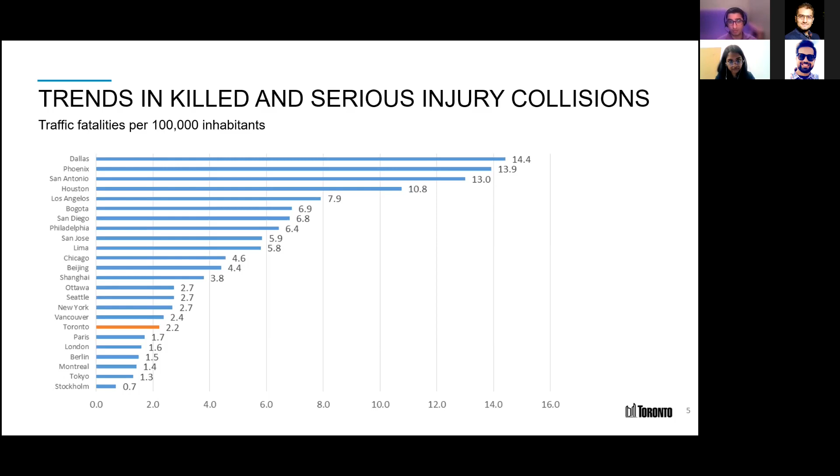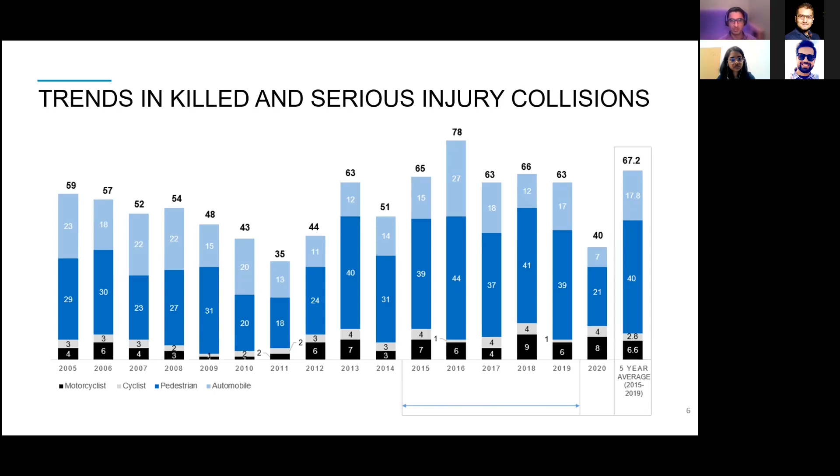Quickly about the traditional way we used to look at road safety versus moving towards a Vision Zero approach. So it's really about changing the mindset that traffic fatalities are not inevitable. They're in fact preventable.

Collisions are not due to non-compliant road users. We know that humans are going to make mistakes. Drivers may be put into situations where they can't perform perfectly. So we need to make sure that the roads are designed and operated so that if those mistakes happen, they don't result in serious injury and fatality.

And again, that comes down to moving away from looking at all collisions and trying to reduce them, to actually just looking at the serious ones, the ones that result in personal injury and fatalities.

And again, moving away from it being the driver's responsibility or any road user's responsibility for their own safety, but it's a shared one between those who design, build, operate, and use the road network. And to also move away from being just reactive to historical collisions, but to be proactive and systematic at looking at how we can improve things across the jurisdiction.

You may know that in many ways it's kind of random when and where a collision happens. So it's about identifying where they could happen and ensuring that the design is conducive to avoiding and preventing those collisions. And ultimately, the Vision Zero Road Safety Plan, when it was developed, was reliant on the 5 E's, as you may have heard.

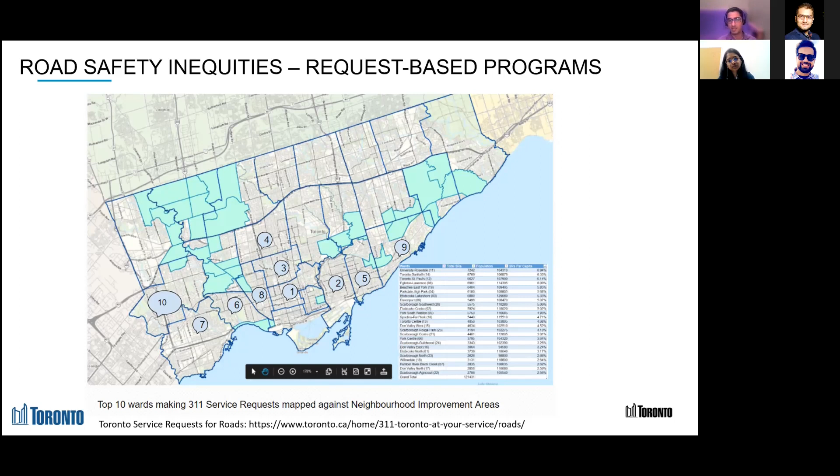And to that - I won't read these - but the city and transportation services have developed an equity mission to make sure that we're being more conscious of that. And admittedly, I think I'll be the first to admit, and the entire organization would say, that this is something we're still learning about. It's something we know historically has not been part of our mandate, and we have not been thinking about this. But to really make sure that moving forward, our work has this lens on it.

To make sure we're avoiding kind of those easy pitfalls we can fall into. And again, the idea is road safety for all, regardless of mode, socioeconomic status. So all of these protected grounds, really, we need to make sure that we're being conscious of that at all times.

This is just a quick, interesting thing about how we use data to make decisions.

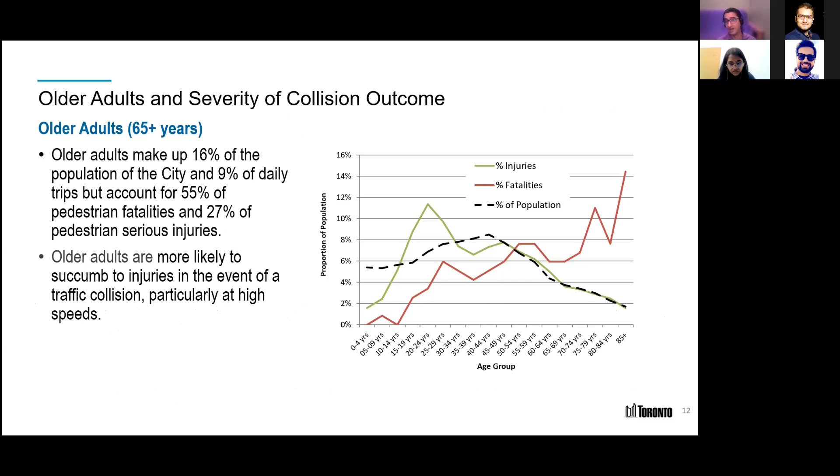Similarly, if we look at the population by age versus the percentage of injury collisions they're involved in, we can see that other than the young being underrepresented, the late teen to 30 age group is overrepresented, which meets our expectations for those population groups. After that, it follows the population curve, representing just as much as they are part of the population.

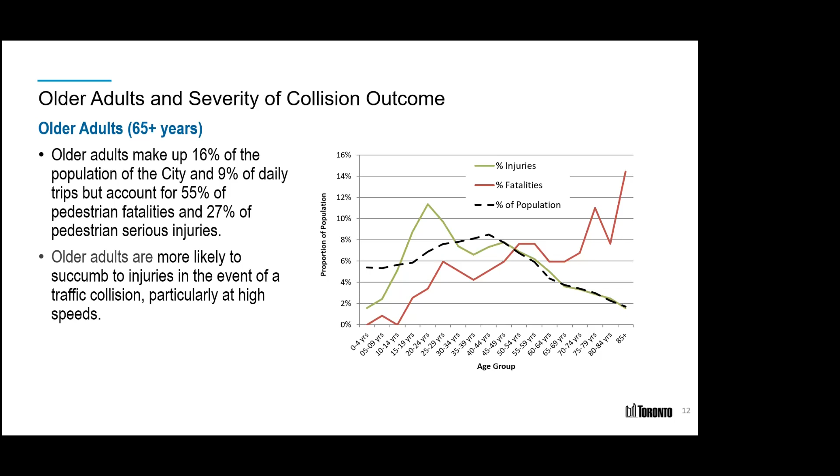However, when we look at the fatalities, we see that older adults are far overrepresented, indicating there's something unique about that population. Most likely it's that their bodies physically can't withstand the impacts related to those collisions, so they tend to succumb to their injuries much more frequently. This tells us there's something unique about this population that we should look at separately.

To that end, when the road safety plan was developed, these emphasis areas were looked at as unique populations needing a primary focus. So you'd expect the vulnerable road user class, like pedestrians, cyclists, even motorcyclists, who don't have the protection of a vehicle around them. And older adults and school children have those unique needs.

Heavy trucks was actually one that was added later. There were a few high profile collisions involving construction, so that's something Transportation Services has been asked to look at separately.

Again, this is a bit more of a reactive approach, but it's still very valid in that if we're seeing that trend, we want to make sure we're addressing it.

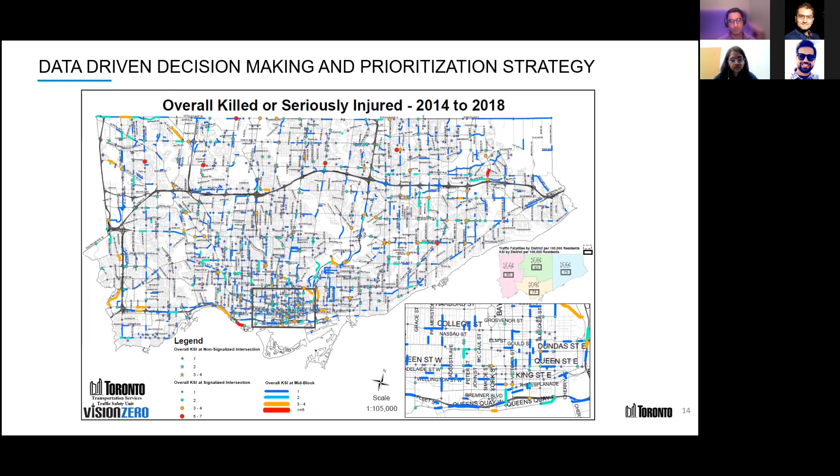When we look at it more, we have high speeds as a primary cause of that. Then we start to look at all the pedestrian collisions, we can identify problem areas where we see most of these collisions happening. For example, if we look at all the pedestrian collisions, we can see that about 40% of them are happening mid-block.

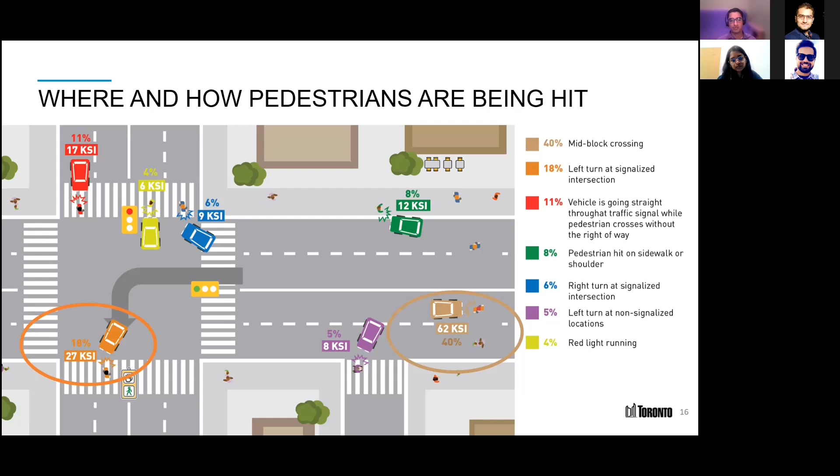If a pedestrian is trying to cross at an unsignalized location, maybe they're not able to judge the timing well, and there's an unfortunate collision there. Surprisingly, the next highest percentage is left turns at intersections when the pedestrian does have the right of way. Obviously this shouldn't be happening, and the city has proactively been looking at ways we can improve that. The mid-block one is a little more complicated - it's representative of an issue, but it's harder to figure out what will help solve that.

As we try to break it down, we can see there are some unique things about Scarborough that have resulted in this issue. On the next page, it has the longest length of high-speed arterials, which are speed limits of 60 or more. It has the longest walking distance between protected crossings, which, as you can imagine, would potentially encourage pedestrians to cross mid-block because they want to avoid what they'd consider a detour to go to a signalized crossing, even though it's safer.

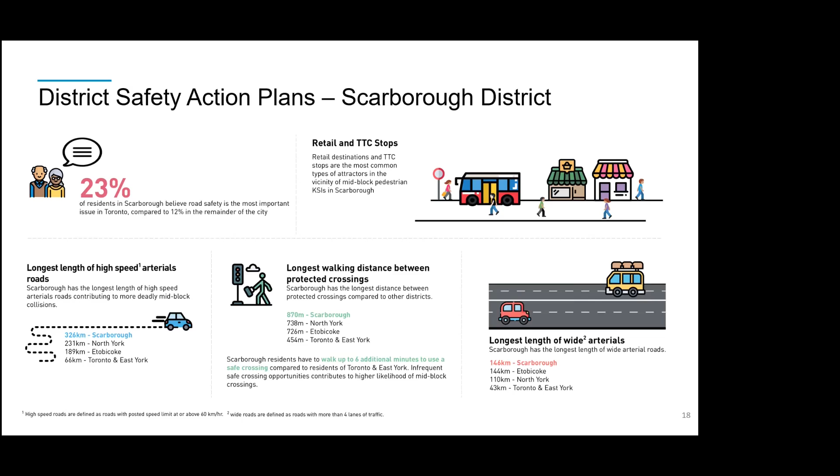You may have seen these watch your speed signs - those are new. School safety zones is something that's been very visible and of public interest. Automated speed enforcement, you may have seen, was introduced in the last few years, and somewhat divisive, but realistically we haven't heard the complaints we were expecting, and we really think that's a strong tool that's going to help us going forward.

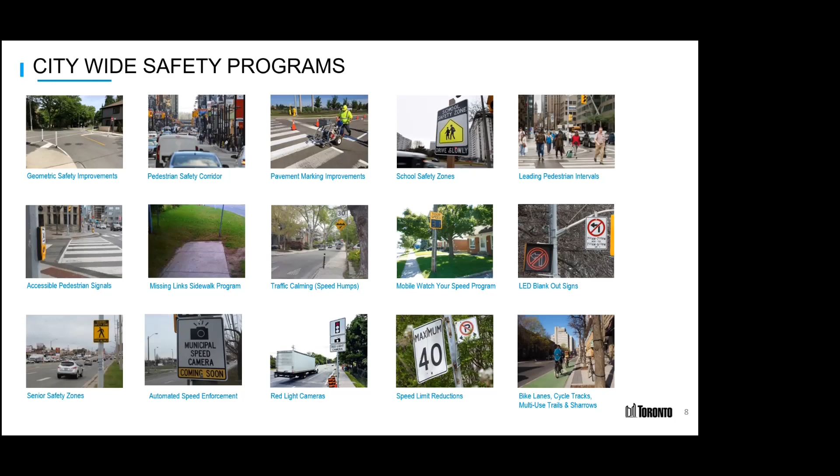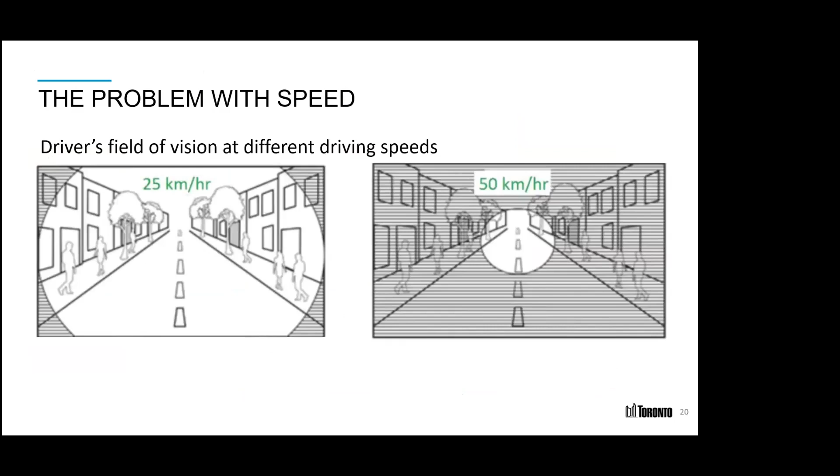Coming back to the overrepresentation of the arterials, I'm sure you've all seen things like this, but the faster you're driving, the harder it is to react to unexpected things. The faster the vehicle is moving, the less likely the pedestrian is to survive a collision. And that comes down to that bottom point there.

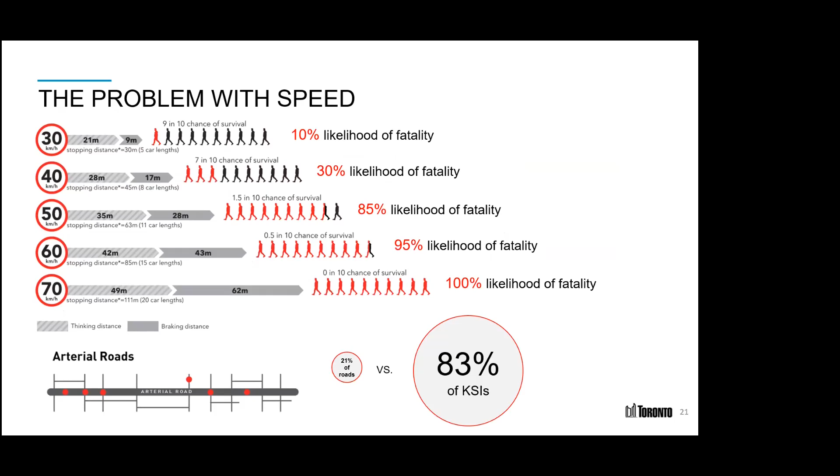Regarding arterial collisions - to that end, part of the Vision Zero Road Safety Plan update was actually a speed management strategy, really working on finding ways to lower speeds on the road.

This is something that, having been around for a while, I know 10 to 15 years ago may have been relatively undesirable by the public, but especially by our politicians, who really felt like we need to make sure Toronto is moving at all times - we want to avoid congestion, we want to avoid delays. But it's really been recognized that the safety concerns around those speeds far outweigh the concerns with congestion or delay.

We know that just changing speed limits is not going to get the job done. So it's really more of a holistic program that involves road design improvements - that's something we're dealing with, over 100 years of roads being designed primarily to move vehicles, to start thinking about slowing them down and helping to move people instead. Watch your speed signs, automated speed enforcement, public engagement - just really trying to make sure we have buy-in for what we're doing. So I'll go into some of these in more detail.

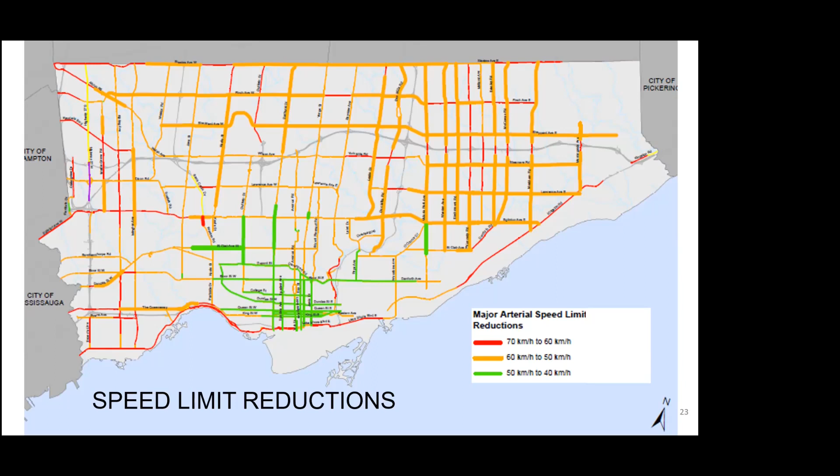For example, when the Vision Zero Road Safety Plan update was put forward, there was about 250 kilometers of speed limit reductions that went through, again without much resistance - the political will is behind this. Despite some frustrating emails we may get, someone saying 'why did you change the speed limit?' and admittedly despite maybe some compliance issues, we got buy-in and we've done a large swath of speed limit reductions, and we are continuing to do that.

We've started rolling out a 30-kilometer-an-hour speed limit reduction on all local roads. This isn't just for downtown, this is all local roads across the city. We want it so that when somebody enters a residential neighborhood, the context tells them this is a 30-kilometer-an-hour area. I don't want someone driving that fast in front of my house, so why would I do that in front of someone else's house?

This is based on a recent change to the Highway Traffic Act. We're changing the way these are signed. Some other municipalities have been using this method as well, where you sign at the gateways, and when someone enters a neighborhood, they know that unless they see a different speed limit sign, the speed limit is 30.

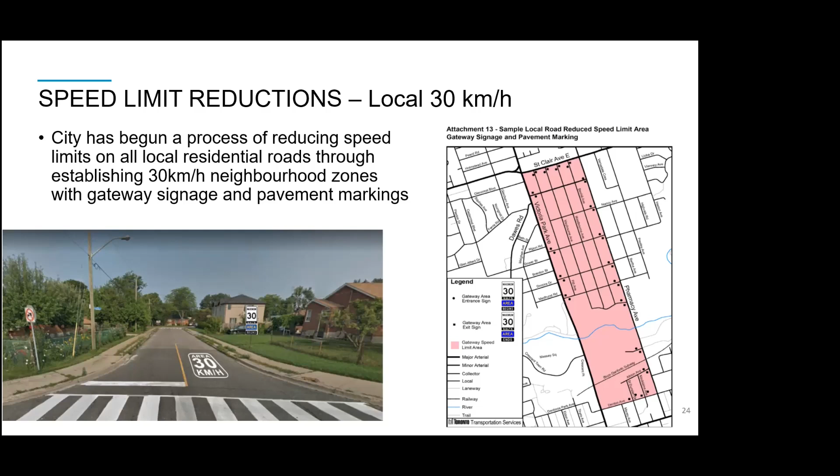We know it's going to be a bit of a learning curve. We're relying on councillors to ease concerns with their constituents, but ultimately, when this is rolled out across the city, the intention is that this is the default. You know what it is, and you're responsible for maintaining that speed.

When I mentioned better designing our roadways, there's many different ways to think about that. Over-design of the roadways is quite contrary to safety—it often allows people to drive faster. What we're looking at here is turning movements, the right turning movements in this case, where we know these movements can conflict with pedestrian movements at an intersection.

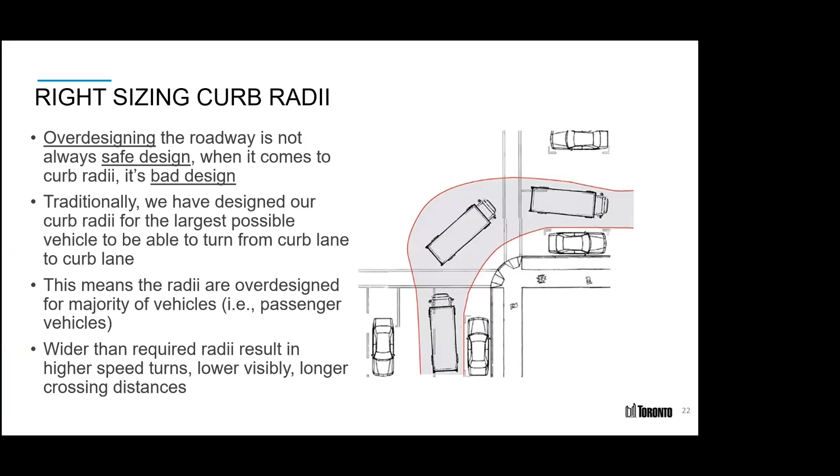If you're turning right, you're crossing both pedestrian crosswalks, so one or the other, it's going to conflict with the right of way of a pedestrian. The more you slow down a vehicle making that movement, the safer it is, the more chance they have to react, and even if there is a collision, it's much less severe. So it's really about right-sizing those turning movements, those curb radii, so we can slow down those turning movements.

It's common sense that it works, but we've done the effort to demonstrate that. This is a near-miss analysis, based on algorithmic analysis of video data, which flags any time a vehicle and a pedestrian get too close to each other—what you'd call a near miss. Actual collisions, particularly serious ones, are relatively low frequency, to the point where they're somewhat random in where they occur. If you have one at an intersection one year, you don't know if you'll have one there the next year. But these near misses are much more common, and they can be indicative of a concern.

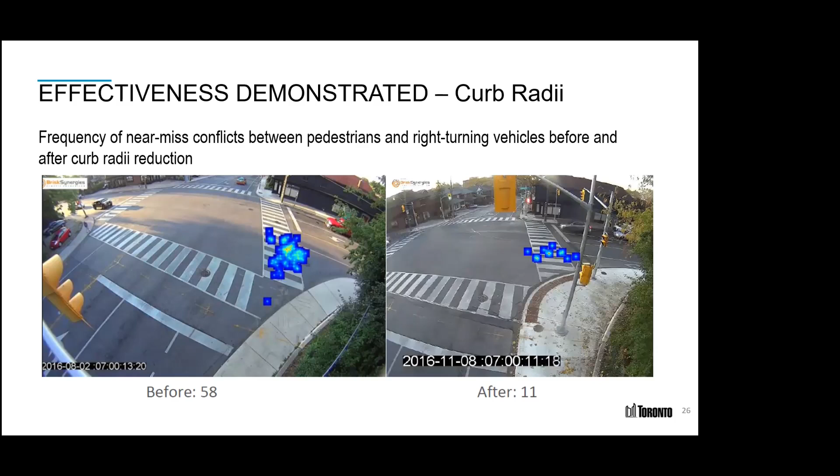In this case, this analysis was done, and you can see an 80% reduction in near misses alone from that turning radii reduction—both reducing the crossing distance for pedestrians as well as slowing down the vehicles that were turning.

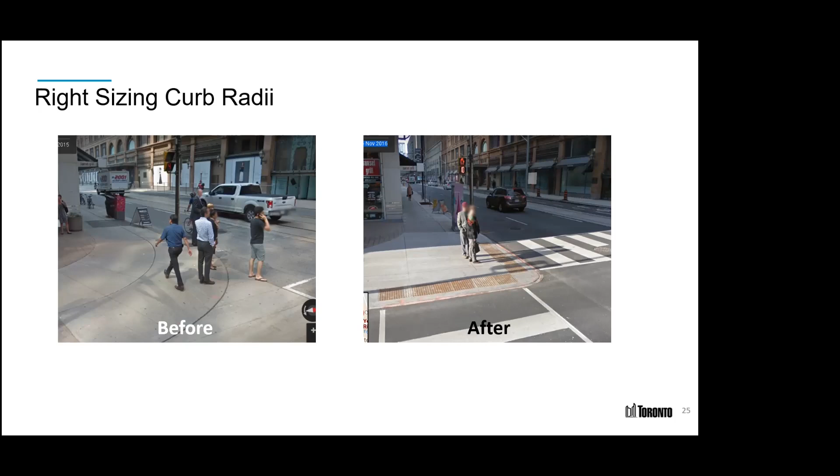It allows us to do stuff like this, where these are two one-way streets where there are no turning movements, so why not give that space back to the pedestrians? This is a downtown intersection, it gets really busy—I believe this is on the Bay Corridor, where we know there's lots of movement, particularly around the train schedule, like those surges of pedestrians going to Union Station. So this allows us to gain that space back for the pedestrians.

We've come up with some interesting alternatives around concerns where there's heavy truck movement, and we know we have to over-design those curb radii to facilitate those movements. However, 95% of the other movements are smaller passenger vehicles, and they don't need that curb radii. So why are we designing for the worst case scenario?

In this case, we've recently developed guidelines for what we call truck aprons. The intention is that passenger vehicles will take the long way around, but it allows the heavy trucks to perform their movement with a wider turn so they can mount that asphalt curb. But when they're not there, it actually allows pedestrians to use that space more safely.

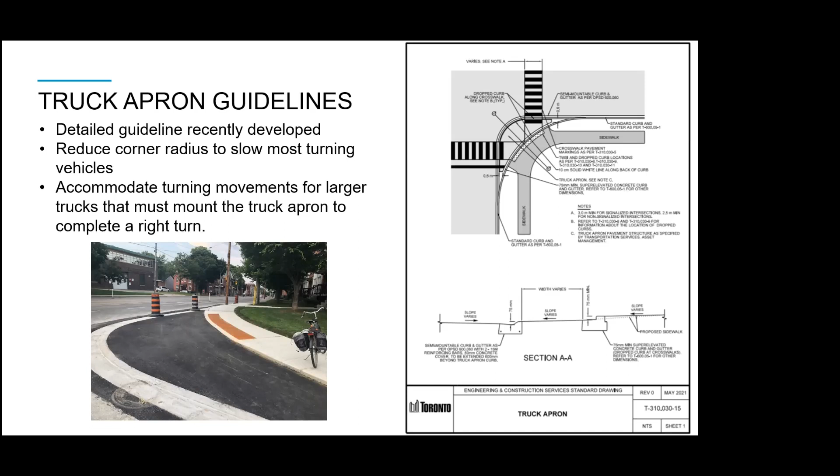Outside of intersections, it's been studied and shown that the wider the lane is, the more comfortable drivers are, and the faster they drive. As we demonstrated earlier, that's a cause for concern and results in more serious collisions. So that's also a part of the effort.

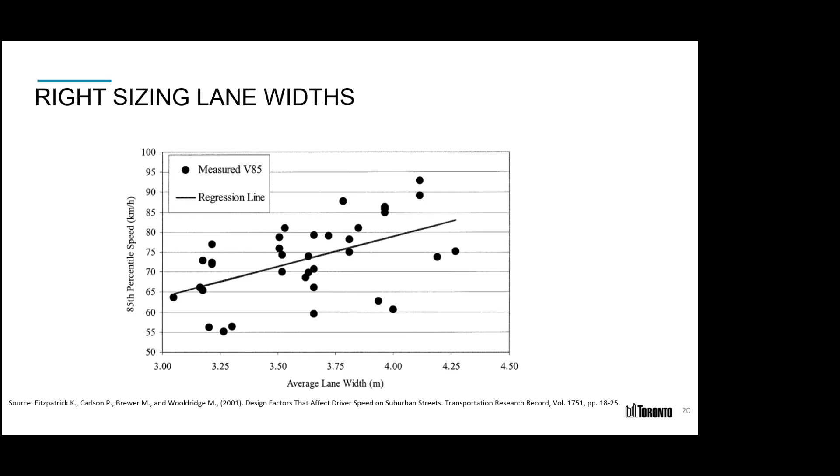We're challenged in that road narrowing as a permanent measure is something we only do during reconstruction, and we don't do it during resurfacing. It has to wait for reconstruction, which, based on the lifespan of our streets, is relatively long. 35 years for an arterial, but double that potentially for a local road with low volumes. So the hope is that when we do them, we do them right so they last for their lifespan and are safer.

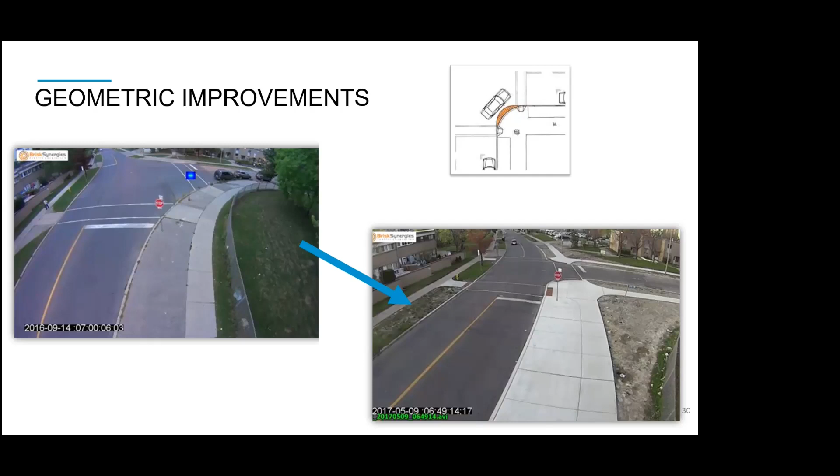This is an intersection level project that was completed. That intersection on the left is unnecessarily wide, leading to long crossing distances and allowing vehicles turning left or right to pick up quite a lot of speed. This is a relatively low volume area for pedestrians and vehicles, there's a school on the left, or maybe just a house, but regardless it's low volume - but you never know. Something can happen, and it's our responsibility that when we have this opportunity, we look to improve the situation, narrow the lanes, and even gain more public land for landscaping.

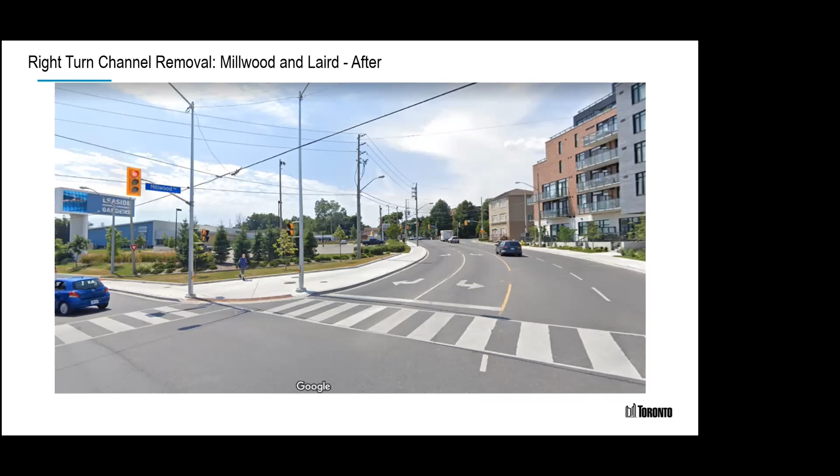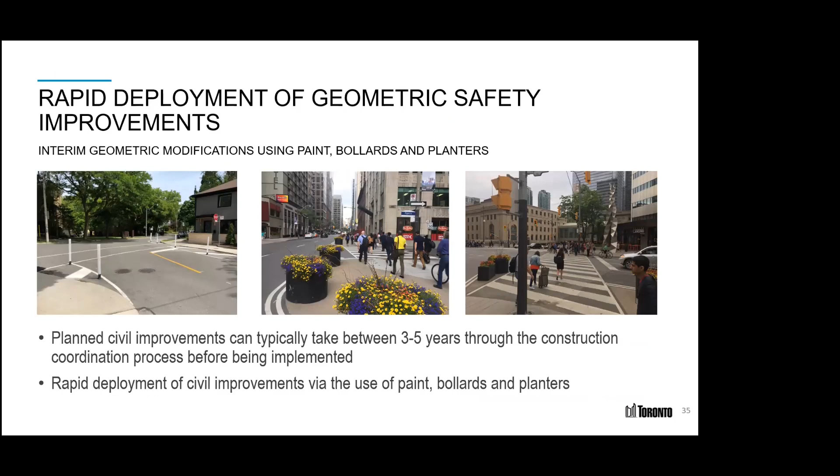Even when we know other work is happening, and that in about 5 years that work will be done, we can get ahead of it and implement improvements on a temporary basis in the meantime. So we've been trying to understand how to best use paint and flexible bollards to narrow those lanes and right-size those intersections before we get to the point of permanent fixes.

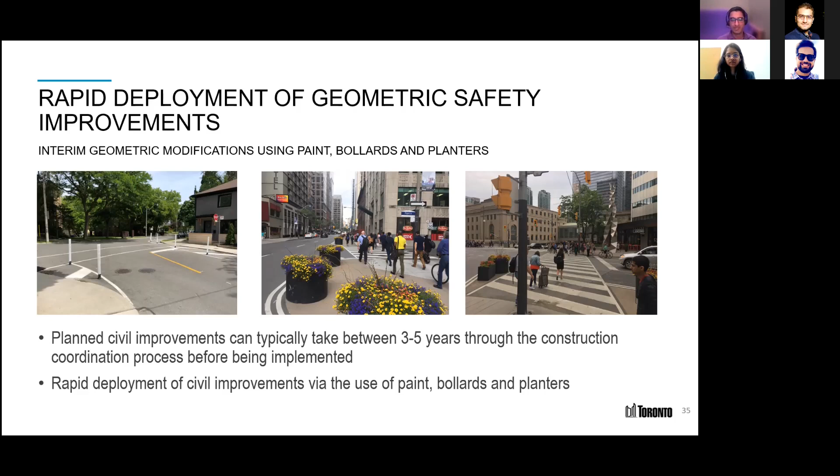This is an example of a really wide, over-wide intersection - nobody needs all that space to make the appropriate turning movements. So we're able to use paint and bollards to choke up that crosswalk. Technically the crosswalk isn't narrower, but with those bollards there's some sense of protection - you can see 60% of that crosswalk is now behind those bollards. It still requires a lot of attentiveness from pedestrians to make sure nobody is misusing the intersection, but we know that's what we want the intersection to look like in the future, so we're able to proactively implement that quickly.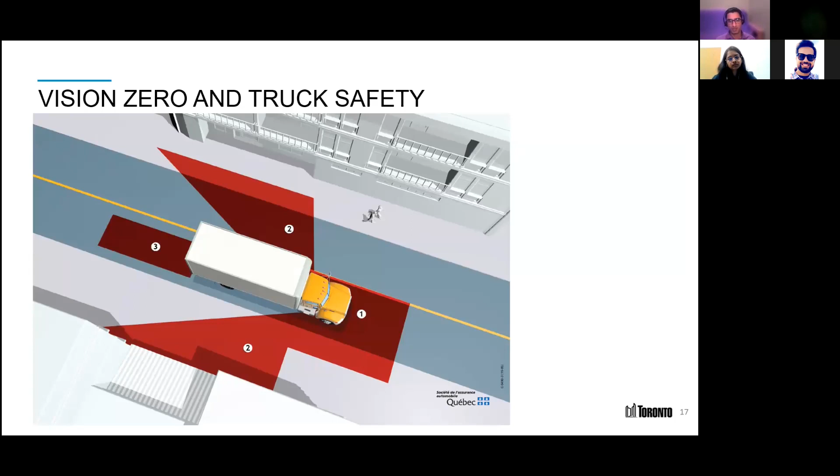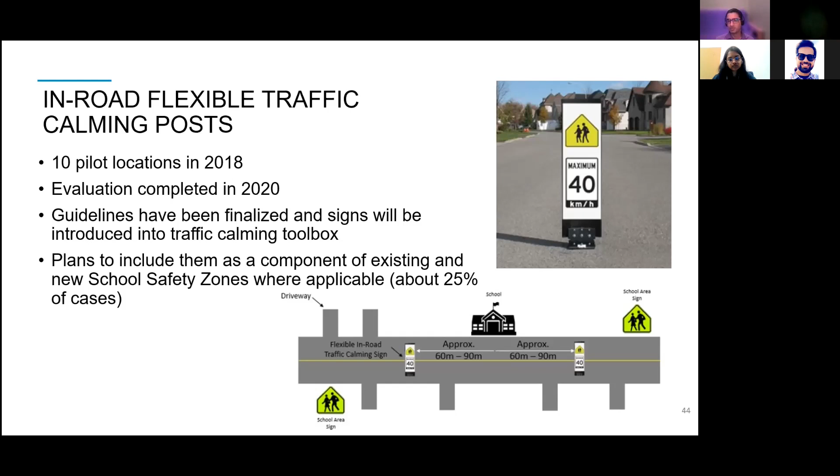Flex posts we're hoping to do a bit more of. We've demonstrated they're relatively effective on a narrower roadway, where it's at least a reminder to slow down. On these narrow local roads where they're relatively wide, this helps to create a little choke point that would slow down a vehicle passing by. We want to install them around schools particularly, but also looking at them as part of the broader traffic calming toolkit.

Left turn calming - we recently started a pilot of this. Essentially, it's a hardened curb at the center line that causes left turning vehicles to change their angle of approach, which helps with sightline issues for pedestrians since they're not obscured by the frame of the car, as well as slowing them down because of the tighter turning radius. We've installed some pilot locations and are doing video analysis on them. We believe they'll be effective, as they've been effective in other jurisdictions, so we'd hope to roll these out, particularly at wider intersections where vehicles can pick up a lot of speed on a left turn due to the number of lanes they're traversing.

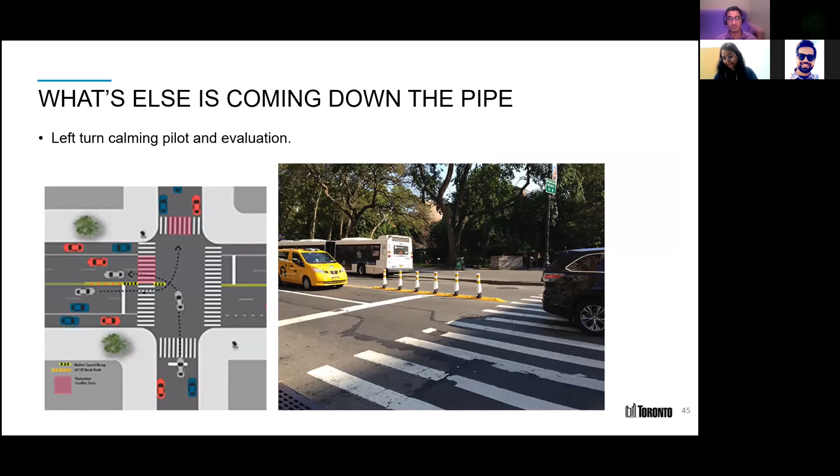Enforcement is something we know, based on internal documents the police have shared, has not been a focus, particularly as far as speed and some dangerous driving practices - they haven't been enforcing as much as we want. So we're really trying to push for more of that.

We know there are challenges and issues with manned enforcement - we need to think about who is being enforced, where and when that enforcement is happening, and whether we're applying an equity lens. This is something we're learning more about. We've engaged in partnerships with the police to make sure they're being more proactive, but we do think enforcement is a key tool in road safety, particularly with speed limits - it really helps if reductions are enforced by active enforcement. Automated speed enforcement is something the city has been doing for the last year or two, and we hope that will expand in the future.

You may have seen this - a highway safety manual was developed about 10 years ago, and we've looked at it as a way of confirming some of our approaches, especially if they're relatively untested in the city. The Crash Modification Factor Clearinghouse has lots of high quality studies showing how safety countermeasures have been effective in other jurisdictions. Using that, we can see some of the measures we've been doing have demonstrated safety benefits elsewhere, and there's no reason to expect it would be different here. I'd encourage anyone interested in road safety to learn more about the Highway Safety Manual - it's a really great resource.